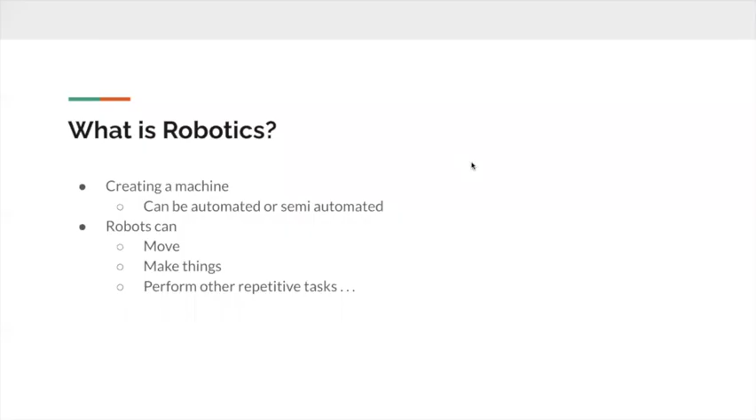Robotics is creating a machine, and this machine can be semi-automated or automated. Automated means it's able to do all of its actions on its own without a human controlling it, while semi-automated means a human has some influence over the robot's actions. For example, a remote control car would be semi-automated, whereas a rover on Mars operating independently would be automated.

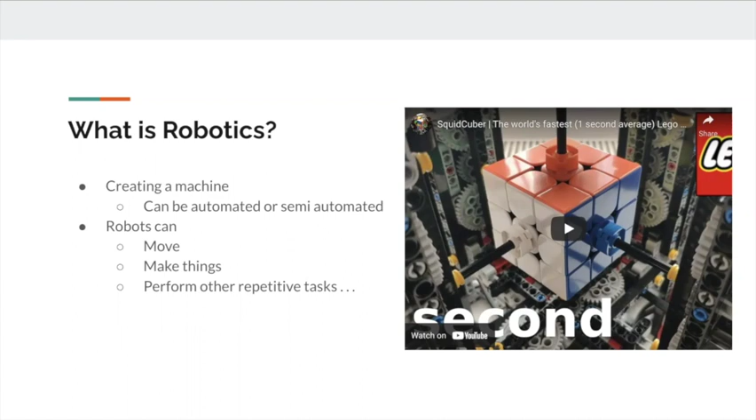Robots can move, make things, and perform other repetitive tasks. The key is that they're able to perform things that are repeatable. For example, with this Rubik's Cube, a couple motors are turning the sides, and that is a repetitive task.

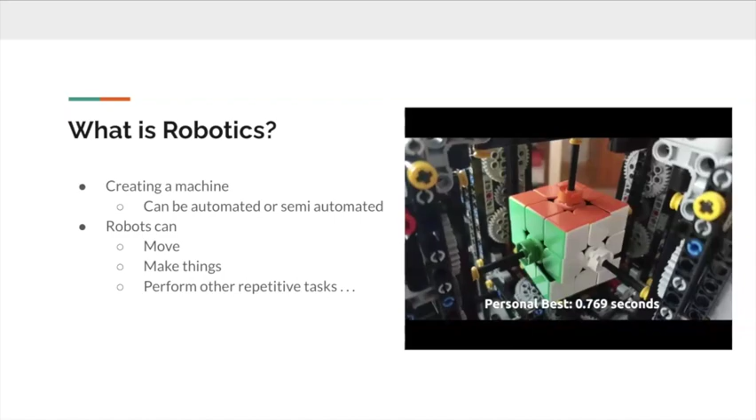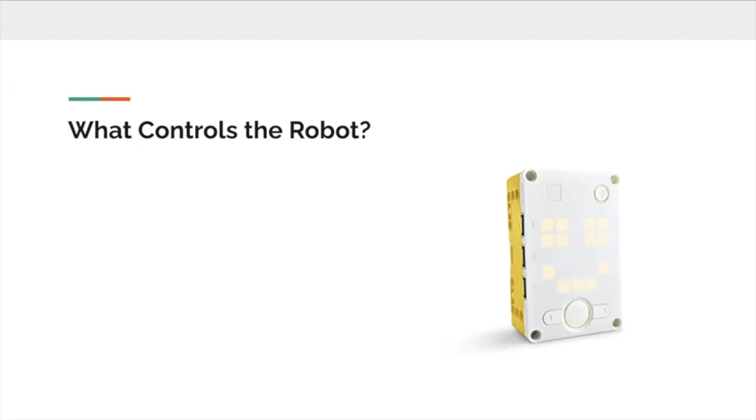Now I'm going to talk about some of the components that the Spike Prime kit comes with. To start off, the robot kit comes with a brain, basically, which is able to control the robot. This has all the information the robot needs to function, as well as a source of power to control the motors and sensors.

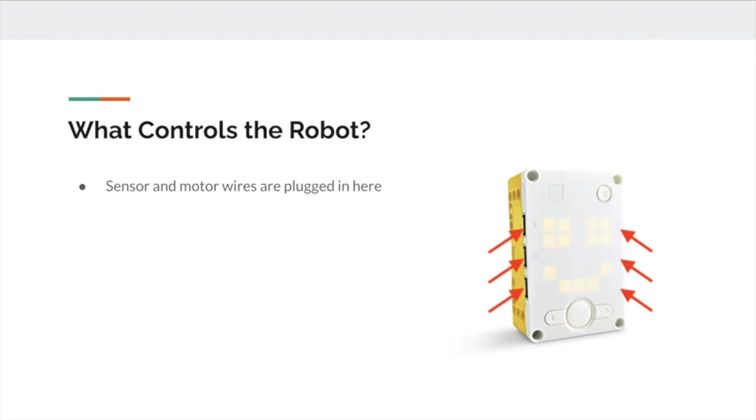The brick itself is the central command center of the robot, similar to the human brain. It interprets the program you load it with and converts it to computer code, which it can provide to motors and sensors to have them move and receive input. It sends and receives signals between the motors and sensors. This is the most important part of the robot because it controls everything happening. If you don't have a brick, you can't have the robot do any tasks because there's nothing to control it.

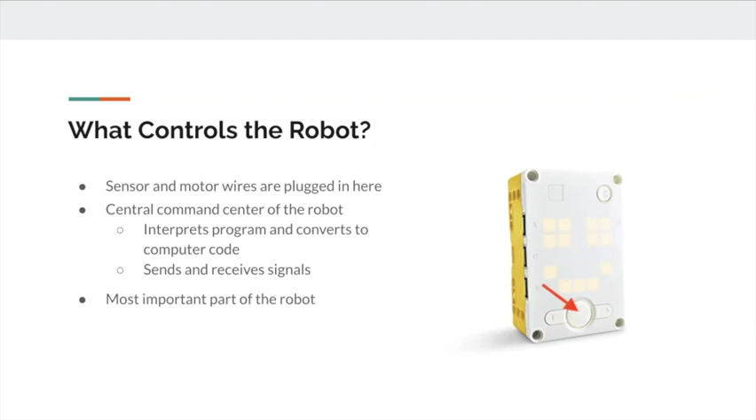The motors make the robot move, and all these motors have something inside that allows them to rotate, causing this part of the motor to rotate. These are usually attached to wheels or other objects, causing them to move in a rotating motion as well. Some things you can attach are wheels, other attachments, and gears, which can in turn move other things.

Spike comes with 2 motors: large motors and small motors. Large motors provide more torque since they are larger and have more power. Torque is basically a measure of strength. If you're pushing a very heavy thing, you need a lot of torque, whereas small motors provide more speed but less torque. You might be pushing something very fast, but if it's heavy, you might not be able to push it because you don't have the torque.

Small motors are capable of pushing things very fast or rotating very quickly, but once you tell them to rotate something heavy, they begin to struggle. Whereas large motors won't have an issue turning under a lot of weight, but may not be capable of rotating as fast as a small motor. Because of this, on heavier robot designs, large motors are primarily used for the wheels since the wheels are holding a lot of weight, so they're able to provide the necessary torque to move the whole robot.

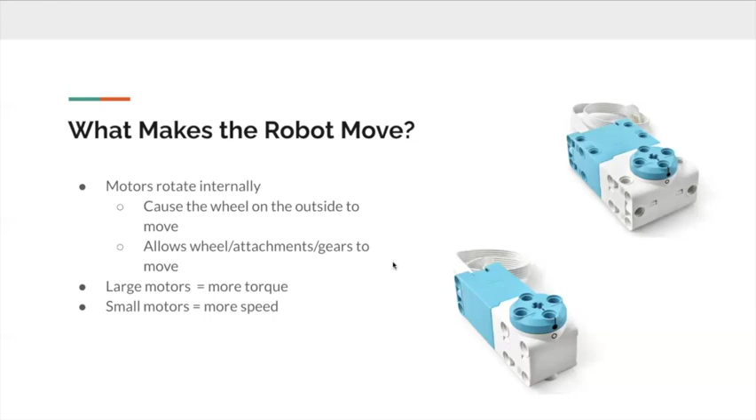Wheels are attached to those motors and rotate along with them. If the motor makes one rotation, the wheel makes one rotation as well. One rotation of the motor results in the wheel traveling its circumference - the measure of the length around the circle. So if you have a wheel with a circumference of 5, the motor will travel 5 centimeters for each rotation.

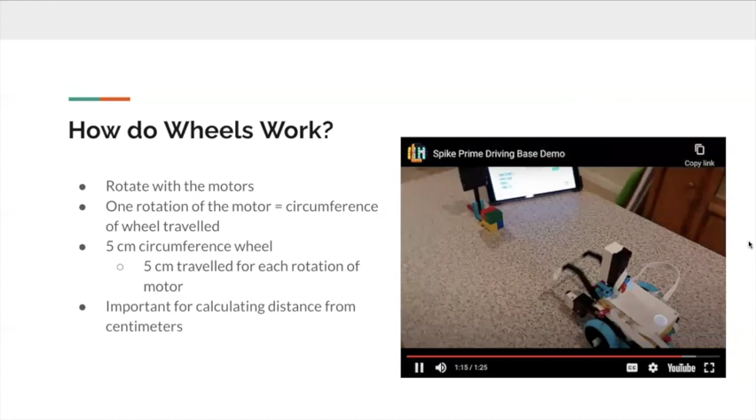In this video here, this robot moves a certain set distance in order to capture the block.

The wiring is able to transmit information between external components and the controller, and in our case those external components are things like sensors and motors. Good wiring prevents the robot from catching onto obstacles when executing the program. If you have wiring extending out of the base of the robot, it can potentially catch onto other objects and prevent the robot from moving forward. But if you wrap it around other components or thread it between pieces, the wires will be closer to the base and won't catch on potential obstacles, so your program will run as intended.

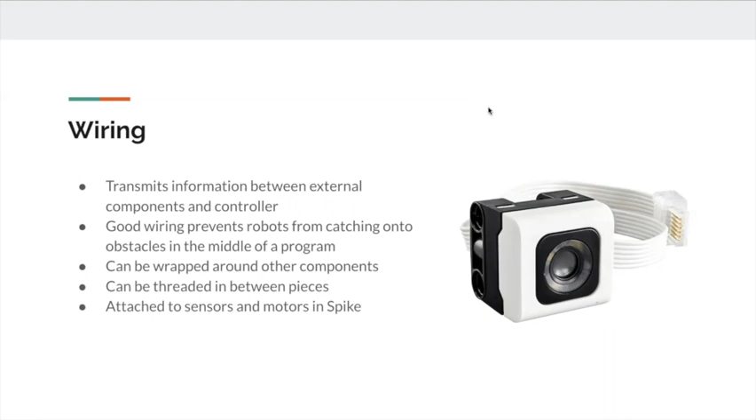Lastly, we have sensors, and these provide input to the controller of the robot. The robot is able to use that input to control future actions, which you usually decide in your program. These offer various functions, including a method to align the robot, follow lines, detect touch, and detect distance.

Inside the brick, there is a gyro sensor, which is able to detect the angle the robot is at. If the robot is turned 90 degrees, the gyro sensor would say it's at a 90-degree angle, but if it's straight, it'll say it's at a 0-degree angle. This can be used to program the robot to go in a straight line, as well as make accurate turns. The gyro sensor also comes with an accelerometer, so it's able to detect the speed at which the robot is changing angles, which can also be used if you're trying to program a two-leg walking robot.

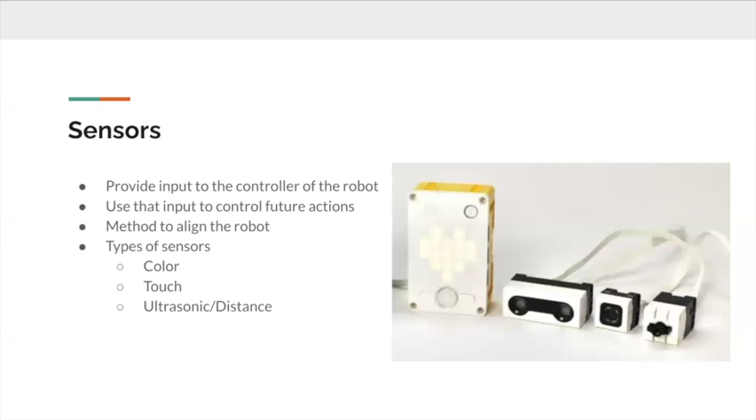And so that's just a quick introduction to the components in the Spike kit. In the next video, we will be talking about the base robot.